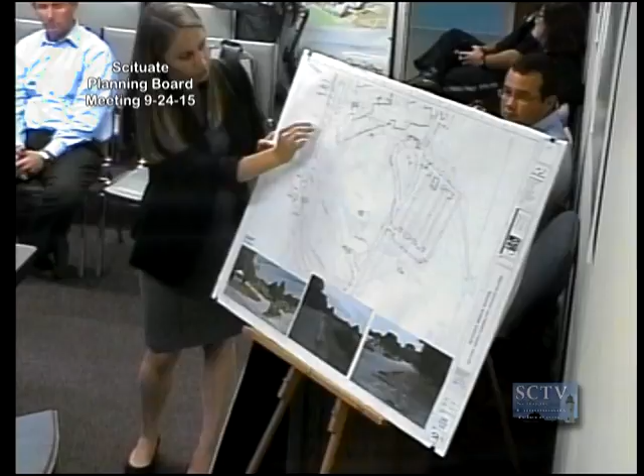Both are related to the driveway. Sorry, I know this is tough to see because it's in black and white. So the first thing we looked at was the access being provided off Chief Justice Cushing Highway. Something we had discussed before is maybe widening this drive a little to provide a third lane, so you would have 2 lanes for egress and 1 lane for coming into the site, up to a point about 400 feet into the development.

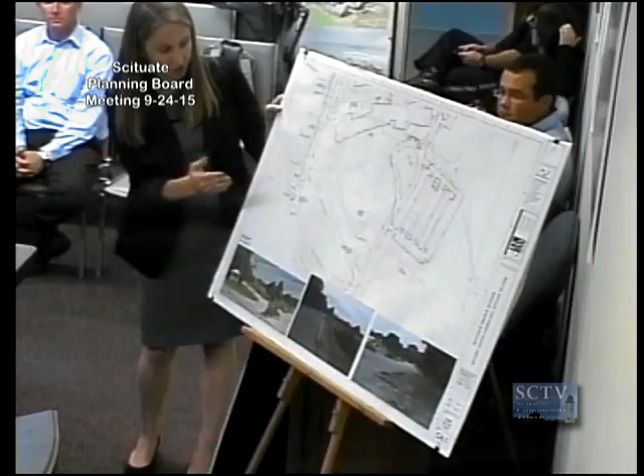This configuration allows for that, and actually uses area already being used for parking - that gravelly shoulder, already kind of a degraded area, so it formalizes that with curbing and pavement. It's a pretty minor change, but it allows for much better use as far as exiting the site. So you have 2 lanes coming over to the right-hand side, allowing for left and right out onto 3A. If there are any questions, I can address them.

And that doesn't change the curb cut on 3A? Exactly. We wanted a solution that wouldn't touch the curb cut so we wouldn't have to work with Mass Highway - it was already wide enough. It does, however, require a little reconfiguration of the existing landscaped island. It just shifts it closer to the south, you can see here. But that's about it - it can still be a landscaped island.

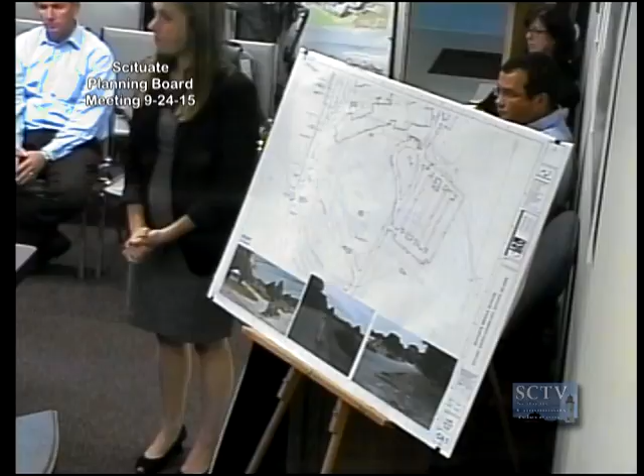So you did that portion - have you addressed First Parish Road on another sheet, or is that next? That already had 2 lanes for egress, so we had already provided that there. There were no other issues raised for the First Parish exit.

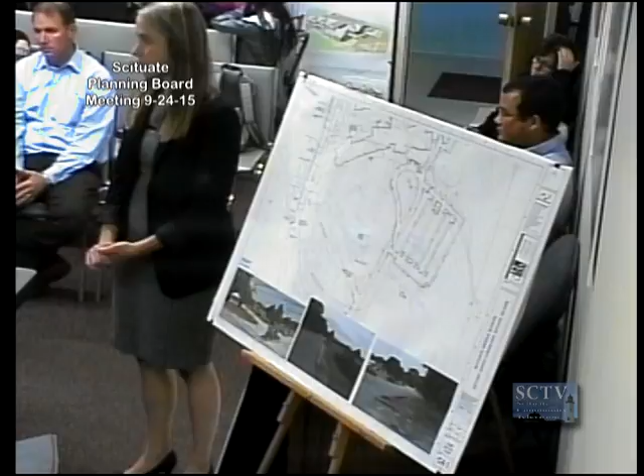I'm not sure what else. Okay, well, would you put an island, something that would really delineate between the 2? Yes. So you have 1 way in, and 2 lanes leaving. 2 lanes leaving. Well, there's an island there now.

Yeah, it is, okay. I'm just thinking about what it looks like now with the Town Hall lot also being there, just playing with that. Yeah, pictures covering it, unfortunately. Yeah, I know, exactly, I wasn't.

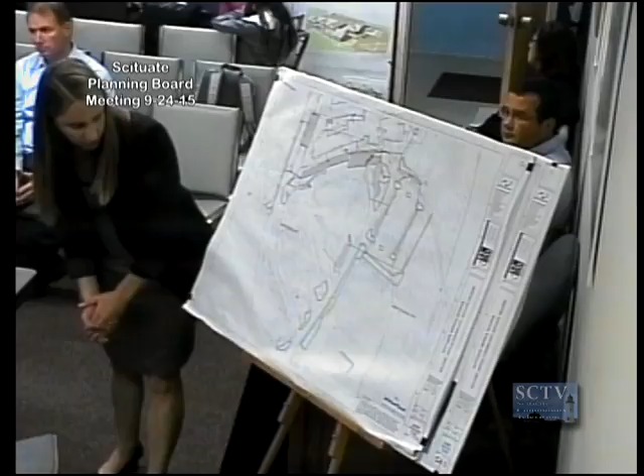We were proposing - because there was such a wide expanse of pavement, we were trying to formalize the exit to provide the 2 egress lanes. So that is the design. So you'll have 2 lanes exiting, well-marked with arrows - which goes which way? Yes, definitely, with striping and signage.

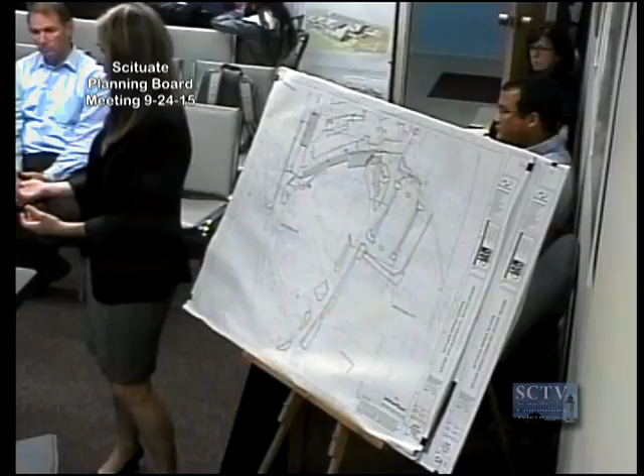And have you determined about the access around what is now Town Hall? Is that going to be one way all the way around, or what? So we've actually discussed a lot of options, and this did come up with the Traffic Rules and Regulation Committee. First, the use of that is outside the scope of this project.

But in terms of the recommendation of Niche and their traffic engineer, it's really up to the town, but it'd be fine to use the traditional - we talked with the Rules and Regulations Committee, and they recommend making them both one way. I think they had done a diagram of that - keep the front of Town Hall in its traditional direction, because the parking is already angled to go with that, and then make the back of Town Hall go from the high school side to the middle school side.

Okay, all right, so their comment was to make them both one way, which our engineer endorsed, with traffic control signs, signage and striping. Yeah, I think that's what we talked about last time. Yeah, if I remember right, yeah.

And also, did you reconfigure further out by the high school, that mess? Yes, we did. I knew you had something else to say. I had something for you. Oh, good. Spin this around. All right.

So again, I know this is tough to see, but we heard you. We saw that you're completely right. When you're coming up here, you're ending up right in the middle of the island. So what we're proposing to do is realign the island, shifting it in.

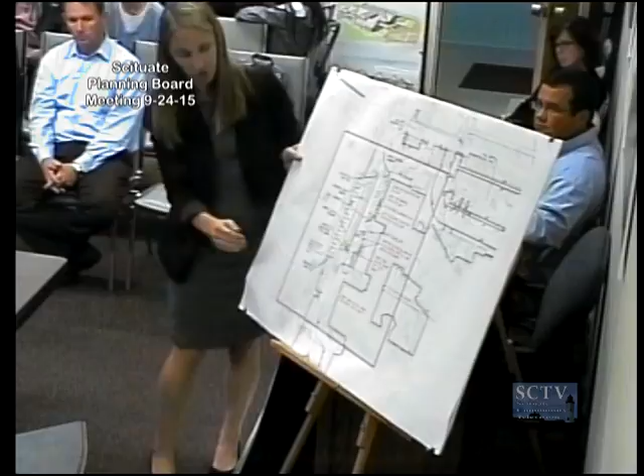We also have some signage to make it more clear. When we spoke with our traffic engineer, one of his recommendations was to pull some signage way back here, so you know what you're approaching, and know whether to go right for a drop-off or continue straight to get to the parking in the rear of the site.

All right, and then just one last thing. It has to do with traffic. You had mentioned at the last meeting that you are putting some type of an area in front of the school that emergency vehicles would be able to traverse, but in order to leave, they would have to back up, and it had to do with the canopy?

There is a reinforced turf lane for emergency vehicles that runs along the front of the new school. But would they be able to continue out past the front door and into the circle? No, they would not. Because the canopy, and there's a mounding of earth, and then there's the vernal pool, so those 3 components pretty much create a barrier.

What we did do is, based on conversations with the fire department, extend that and reorganize the science area a little bit so that lane would continue all the way across A wing and B wing. Originally, it only covered A wing, and there was a gap. But now it will be able to go all the way across B wing if that's necessary, and it can reach the main entrance and C wing from the bus and car drop-off.

Okay, my concern is having safety vehicles back up out of the site. Yeah, the courtyard too. I mean, it's not designed to be regularly used. I understand, but all it takes is one instance - what if you telescoped down the canopy so it wasn't as long? I think we would have considered that. The purpose of the canopy is to reach out and grab the pedestrians when they get dropped off, so they can come into the building covered.

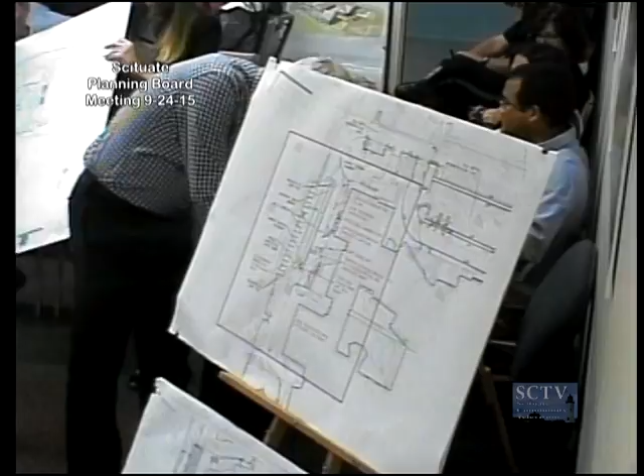Can you just put up the large drawing? Yeah, bring it up, we're gonna have to hold it up though. You have a splice, right? Yeah. Is that in here? Sorry, John, no, it's okay. I can hold it. I'll hold it.

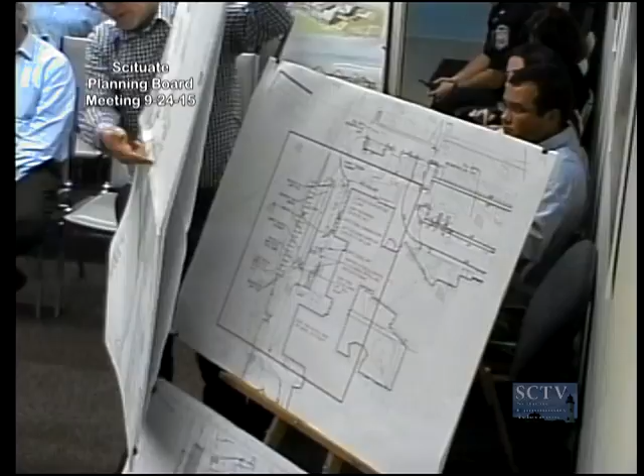So it's dashed here, but the canopy extends out this far. And as Don's saying, the front entrance is actually recessed, and we're limited in our footprint, and at this point our footprint is fixed with the MSBA. The administration wing sticks out in front, so as you're dropping off, you actually can't see the front door. So the extension of the canopy is important, not only to provide a little bit of protection as students are dropped off, but to announce that entry and make it clear where it is located.

And then we have a raised berm here, and then the vernal pool. In general, we've worked hard with conservation to provide a mowed area right up against the school, but to naturalize it as quickly as possible as part of the enhancement of the boundaries of the vernal pool.

So we're trying to limit our development south of the school. Where would this safety boundary be? It's dashed in here, but it actually is the boundary. What this doesn't show is we have a pedestrian path that will be paved to denote the edge.

So the vehicles, if they do have to use it, will know where the edge is. The grass meets it here, and it goes all the way here now. We've redesigned this to allow a vehicle to go this far, so we have complete coverage between the vehicle and the edge.

These bollards are removable. A fire vehicle could drive up onto the plaza and, if necessary, drive all the way there. It seems to me in the case of an emergency and needing to do that, which would be infrequent, certainly...

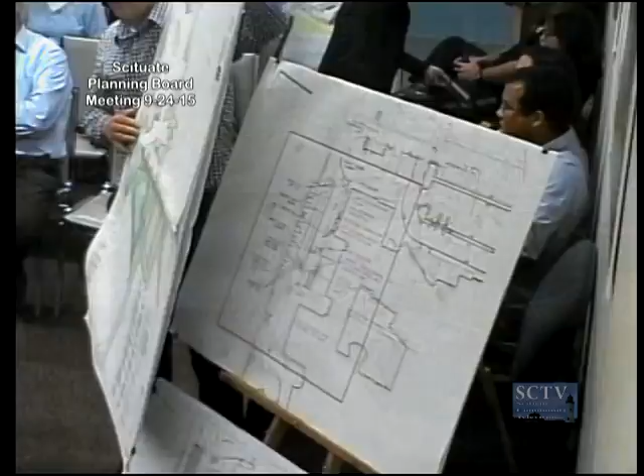That backing out would be monitored by fire department personnel or staff. It wouldn't be an uncontrolled or unsupervised maneuver. The people driving the vehicle would be closely coordinating with somebody on the ground, signaling them, that sort of thing. So admittedly, it's a little awkward to do, but I can't imagine it would be truly unsafe. It should never be used, though.

It's a fully sprinkled building. For a fire to get out of control to the point where you need to drive a truck over here, it would really be a catastrophic event.

Correct. Now, if it's just an emergency response, like an ambulance response, it would come to the front door, or possibly through the courtyard.

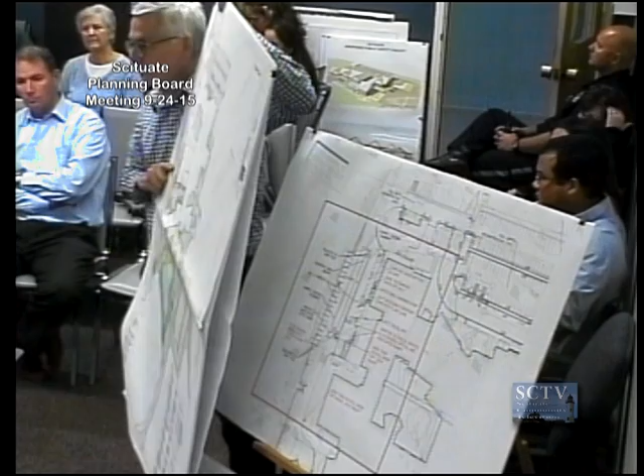Thank you. Thank you. Okay.

Laura? Well, I think one of the things that's happened between the last meeting and now was the traffic rules and regulations meeting. I wasn't there, but I understand there was discussion about an emergency access where the pedestrian walkway goes up to Cedarwood Road, and it would only be for emergency vehicles. There would be bollards at the top, so you could not drive a car there at all.

And that was something the chief wanted. He wanted yellow striping on all of the fire lanes. And then I think the other issue was—Bill, do you remember if there were any other issues besides that?

We also talked about access from First Parish, in the event that there was an emergency during drop-off, with all the cars queued, coming in and out on those three lanes. How can a vehicle get there or to the back of the high school?

So what we've done is, we had a granite curb with sidewalk along here, and we're going to change that to just be a Cape Cod berm, like it is right now—it's actually a little decayed, but right now it's a Cape Cod berm. So if there was an emergency during pickup, vehicles would be able to drive right over that.

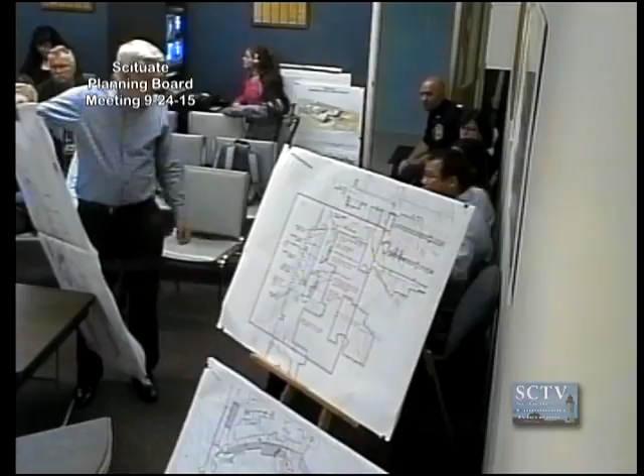Okay. I would emphasize, we're not required to provide 360-degree access to the building. We're doing this as a benefit to the project.

Any other comments? Okay, all right. Do you want me to make a motion to close the public hearing? I move that we close the public hearing on this Scituate Middle School project. Do we have a second? Second. All those in favor? Aye.

Okay, let's move on to findings of fact. Everyone got the findings of fact - I had a number of email exchanges, and then tonight I got a couple of additional changes.

Is this what I'm reading? This is one of the new ones that says 5 PM on it. Timestamp - this is 5 PM, right on the front, yeah. All right, thank you, sir. That's public safety, and this is just the findings of fact. Oh yeah, this is public safety - building. Laura, this is public safety. It's the wrong one - good catch.

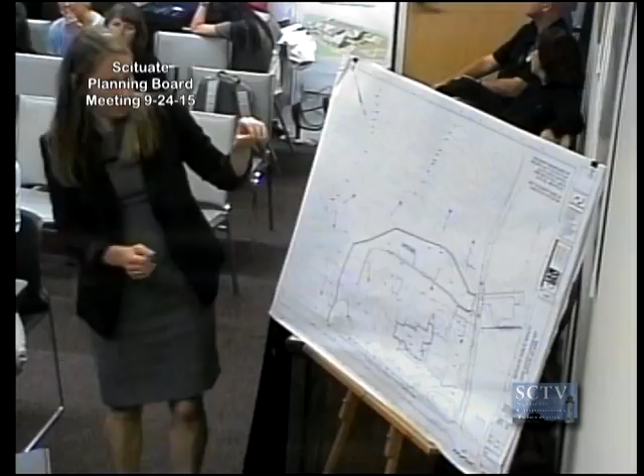So you can see this is our site down here right at the corner of 3A and Mann Lot Road. And as we discussed, it's kind of isolated from the greater parcel. You can really see that here with these contours.

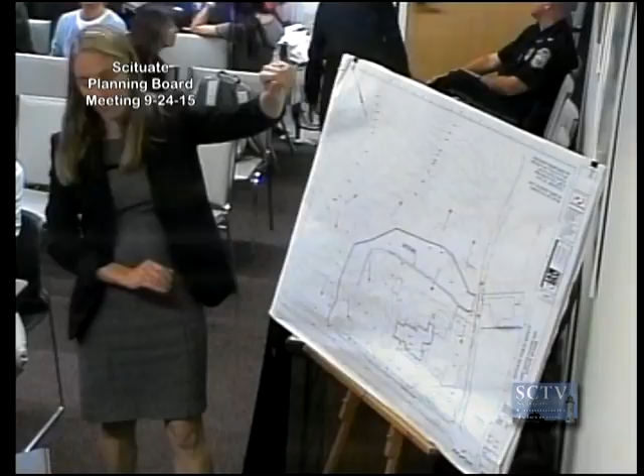This is a high point here, a 129 contour. It slopes down to 124 at the highway, and then back toward the eastern side of the Ellis parcel down to 119. You can see there's actually another wetland located way outside of the project, down that back slope.

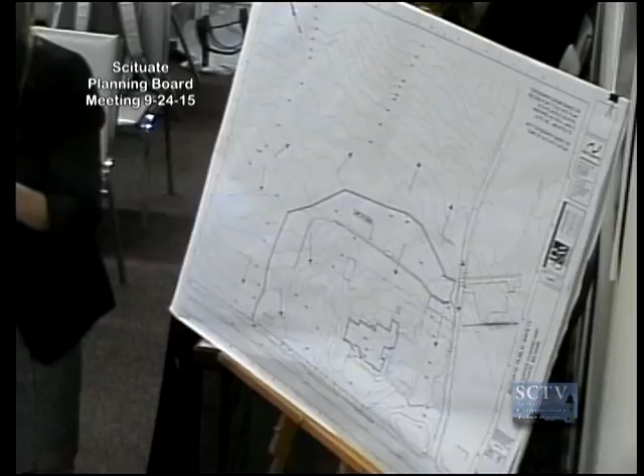There's another high point located just outside of our limit of work that is also pushing water towards the site and then back down Mann Lot Road. So you can see the limit of work line here does include the berm, and right along that line is the swale we discussed, where any water coming down the back side of the berm and water coming from the ridge line towards the site will be pushed towards the site drainage system in that swale.

What's the red thing, the broken line? That's the ridge line — the red is the watershed divide, and the red arrows indicate the flow of water either away from the site or in towards the site.

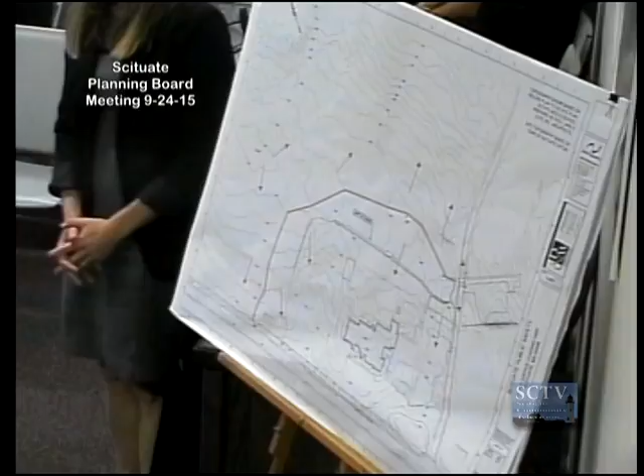So I'm looking at your red ridgeline there. Why doesn't it go all the way to the high point? Because we were looking specifically at what flows into the site. There's actually another break right here - the 122 is split. So from this high point, which is probably 122 and a half or so, this is what's coming into the site, so we took a perpendicular up from that. Water coming down this high point will come straight to the roadway and not be intercepted into the site. That's limited to what's hitting this area here.

So it doesn't climb that slight ridge, it just goes straight towards the highway. With more definition, maybe the line would be here or so, but generally that's it. Yeah, a 1-foot contour is actually pretty good for such a big area.

Okay, I'm having trouble following your contour line straight down. That's a ridge line right there? So this is kind of an interim ridge line - it's probably more apt to describe it as a watershed boundary, because if you were going high point to high point, I see what you're saying, you're thinking it should be pushed further. Yeah, I'm thinking it should run to the high point.

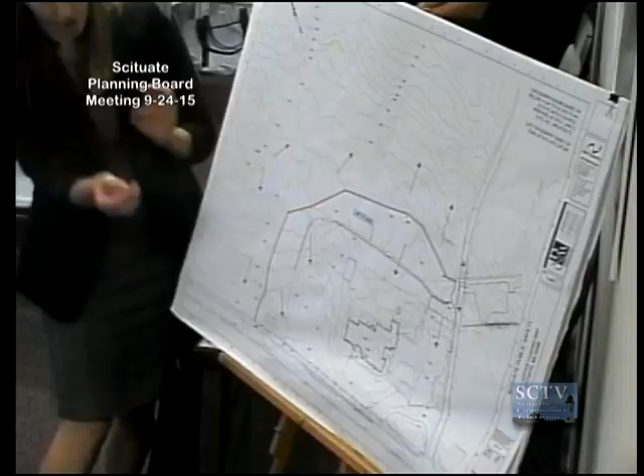If water flowing in this direction is being intercepted at this low point here, this 122, which is flowing this way - we were focused on water flowing in this 122 towards the site. Doesn't water flow this way, right? You can kind of picture it as a cup, like the contour here. It creates like a swale or channel that pushes water along the right-of-way, similar to how there's usually a roadside swale or a crown created - you have the high point there in that swale. That's right, right here. Yep, this is breaking toward the north versus what's breaking toward the intersection.

Right, and there are some existing catch basins - there's one right here, that's what you're seeing. I think part of your concern too is you want to see that horizontal line continue horizontally, right? Along there - yeah, I'm just thinking if that's the high point, if it's sort of a secondary peak, it's going to drain in all directions, right? The primary line is across the top as you're suggesting. As Jennifer said, this is more of a secondary little ridge, just trying to show what would flow towards the parcel.

So a raindrop that falls on one side of the line stays on that side, whether it's going on our side or the other side. Because the land moves up and down right there, that spot? Right here, or close to it - there's a little mini ridge running down there. Okay, that's what I was trying to understand, it didn't look like it.

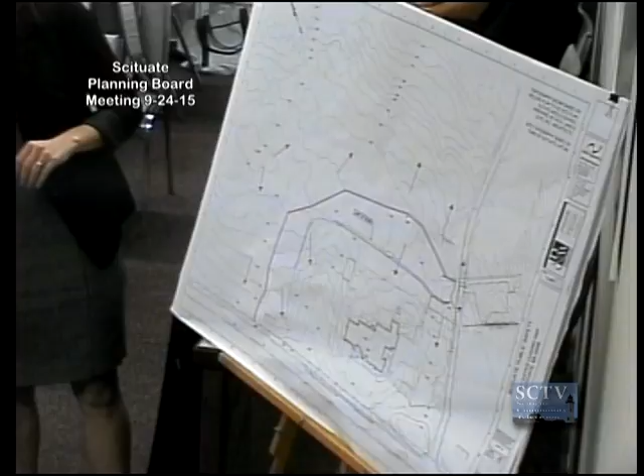Where - and that's the current natural boundary, this is the existing condition, that's right. You can see the contour line wiggles down just a little bit where that ridge line goes towards it, wiggles down towards the bottom of the sheet. So that indicates that's the high point of that particular contour line, right in that area.

So, yeah, I think I see it - it's kind of running down and a little bit towards the site when you get to the bottom. That's right. And so the area that we see...

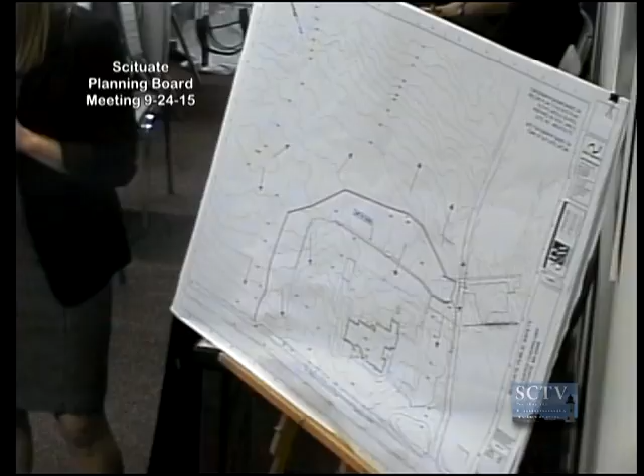Headed towards the site itself, inside the red ridge line - that's all been accounted for in terms of stormwater collection into the existing stormwater systems? That's right. Okay, and so we won't end up with pools and ponds of water in that area there? Right, exactly - that's the intent of having that swale on the outside of the berm, so that you wouldn't have that, no more than it would pool today.

Right, nor more importantly, will you end up increasing the possibility of that on the other side of the line where the abutters are? That's right, it should have no effect on that other side of the line. That's right.

Right, that's all natural boundary there. Yeah, exactly, that's a separate watershed. And then you're controlling the water on the outside of the berm.

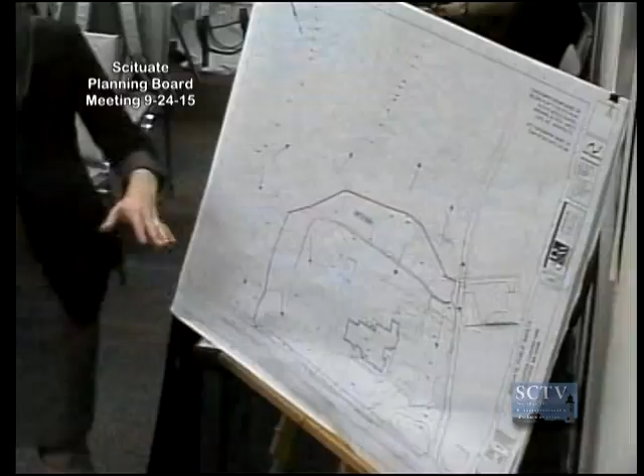So all that water, before you do anything here, it all feeds to the 3A swale, everything right now? That's right. All the water within this red line is what was modeled to the existing points where water's flowing, which is this culvert here that runs under 3A, and again the wetland here. So that's what our analysis is focused on, those two existing drainage points. Okay, so essentially we're looking at the watershed you did the analysis on then? That's exactly right.

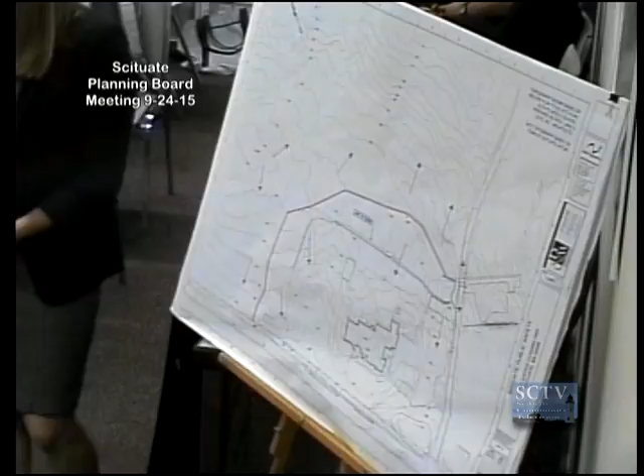Any questions? What have I done on the other side of the road for the septic? Have I changed the grading significantly there? No, we did a little bit of minor grading, actually. You can see it better on this other plan.

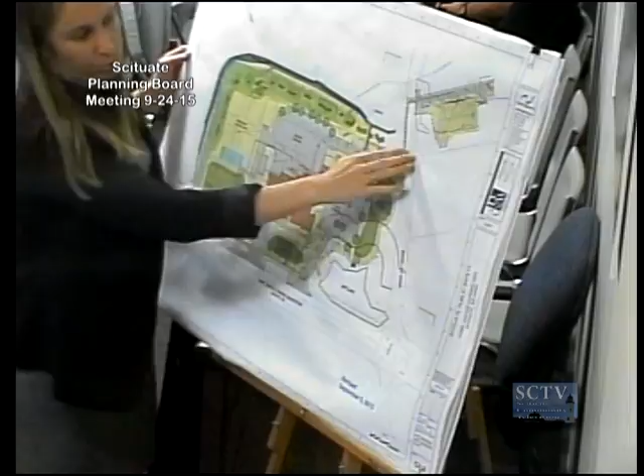The high point of the existing natural high point along the property divide between my parcel, and a little bit of grading was required to kind of flatten the slope over the septic system. But all of the drainage is going to be collected, again, in a swale that's running along this gravel driveway to an area drain that's connected to a perforated pipe system. Initially we had a dry well, but Merrill had asked us to take a look and make sure we were providing maximum offset to groundwater. So by doing a perforated pipe, we were able to raise the system, still maintaining the controls.

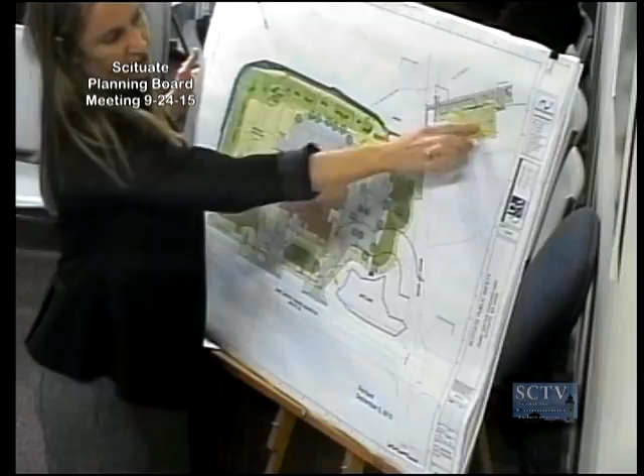It's the same type of analysis where you're matching runoff rates and volumes. So it drains bottom to top, and then it's collected to the right. Okay, to the actually, left. There's a culvert right here for this, pushing one way. Okay, and then pushing here. Got it. Okay.

Got another question on this? Yeah, not on the drainage, on the driveway. Is it appropriate to go to that? Or do you want to stay on?

All right, just a thought, that driveway off of 3A that goes to the public parking was kind of represented at one point as an emergency ingress to the site, in case I've got a problem driving on 3A and I want to get my passenger or myself to a place where I can get emergency assistance. Actually, that's on the apparatus bay apron itself.

Okay, that was my question. We created a cutout, the apparatus bay. I was going to ask if a cutout wouldn't be appropriate on that other drive, but you put it there on the apparatus bay because if the bay doors are open, you can go right in, or you can go in the main entrance, and there's a triage room just off the lobby. That's where I pull over in that circumstance.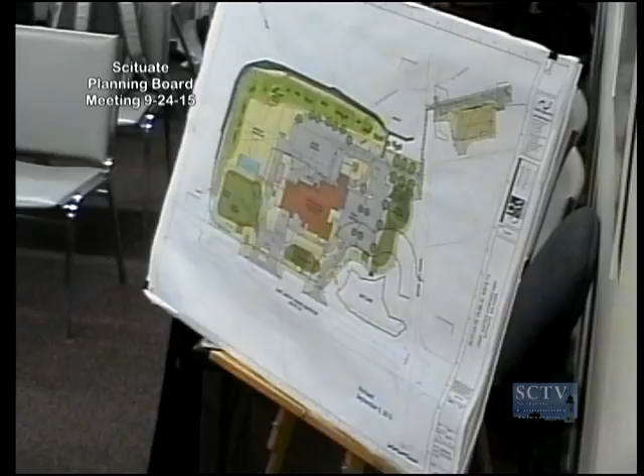Yeah, and that's what people will do now if they have an emergency, because that's the most visible thing, you see the big apparatus bay doors. Exactly. Thank you, good.

And then, can you give us an update on the traffic analysis? Sure, how much of an update do you want? I can go through a quick presentation, or I can just answer questions if you have specific questions. I wouldn't mind the presentation. Since you set it up, we're going to watch it. As long as you're ready to do that. Now if I can get it to go, let's give me this.

All right, so again, for the record, John Diaz with GPI. We came in to look at the traffic operations and mostly look at the interface with the new site at 3A in terms of how to get the emergency vehicles in and out of the site. So we did a typical traffic study. We looked at the site at the corner of Mann Lot Road and 3A, the northeast corner. Did our traffic counts back in April, in the spring. Basically, you have about 15,000 vehicles a day on 3A. You have about 2,000 on Mann Lot Road on the easterly leg and a little more on the westerly leg, about 2,400. That's total traffic over 24 hours a day.

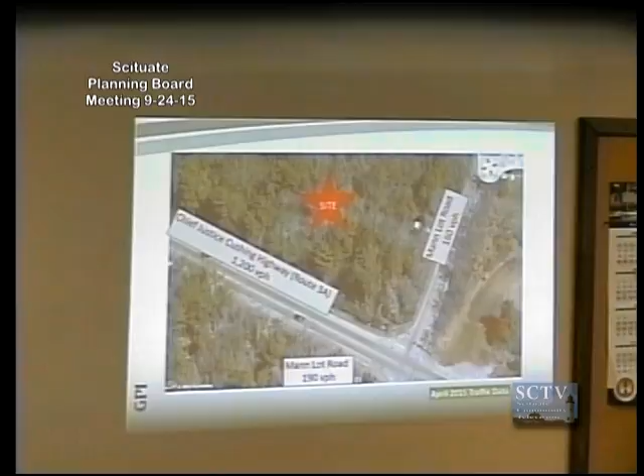We did the turning movement counts at the intersections. Again, we looked at the intersection of Mann Lot Road, and we had the counts on 3A and Mann Lot Road itself. And you can see the movements coming out of Mann Lot Road in the morning.

It's pretty much consistent. You've got about a third going left, about a third going right, and about a third going straight through. Similarly, in the afternoon, same proportions. Coming down the eastbound side, it's a predominantly heavier left turn in the morning and a heavier right turn in the afternoon. And then obviously the directional flow on 3A is what you'd expect: northbound in the morning, southbound coming back. So pretty typical of commuter traffic, what we'd expect to see out there.

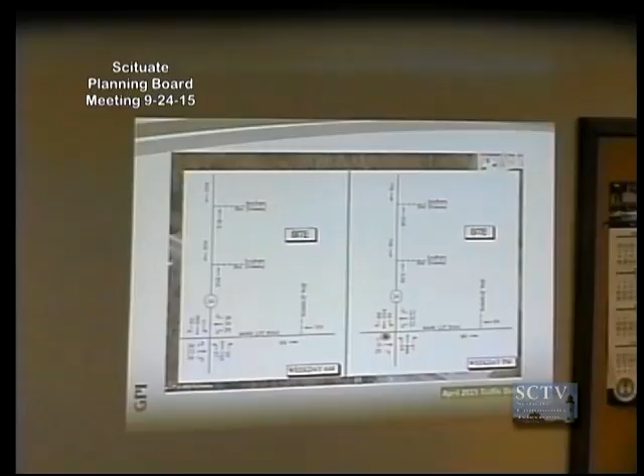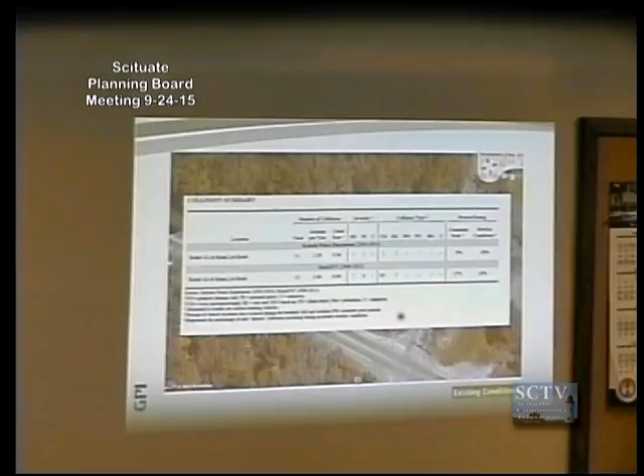We looked at the crash histories at the intersection of Mann Lot Road. We went to both the Mass DOT website and the Scituate Police Department. Between 2010 and 2014, we had about just over 2 collisions a year. It's more important to look at the crash rate, which takes into account the volume of the intersection, not just the number. The crash rate at the intersection is about 0.36 crashes per million entering vehicles. For comparison, the statewide average is about 0.6, and Mass DOT District 5 is just under that, about 0.58. So in terms of how the crashes relate to other unsignalized intersections, this is what we consider a lower crash rate, not a significant safety issue in terms of the number of crashes related to the volume of vehicles there.

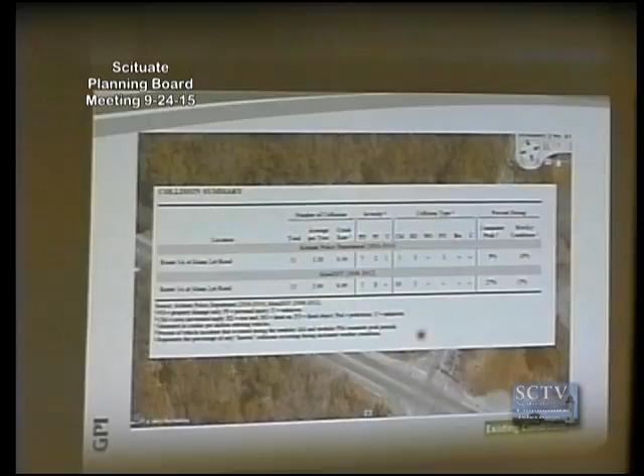The other thing we did is we collected speeds both along 3A and Mann Lot Road in the vicinity where the driveway is proposed. We use that for a couple things: to see how consistent it is with the posted speed, but more importantly so we can evaluate the sight lines for the driveways, how far someone can see up and down the road and how far someone on the road can see the intersections.

The speeds, we look at average as well as 85th percentile speeds. Generally, speed limits are posted in accordance with the 85th percentile speed, and you can see it's posted 50 miles an hour on 3A, and your 85th is right in that range, 47 miles an hour. So it's pretty consistent with what's posted out there. These were collected over a 48-hour period, an average of a 48-hour period.

Mann Lot Road, again, it's a little higher than its posted speed. The average speed is 30 miles an hour. The 85th is a little higher, 33, 34 miles an hour. But again, pretty consistent with what's posted out there for the speed limit.

In terms of the sight lines, as you'd expect, up and down Route 3A, it's a straight shot there. There's really nothing that would affect sight lines once the driveways and trees are cleared out, obviously. We have well over 600 feet, and your requirements along 3A are in the 400-foot range, so we have well in excess of what we need for sight lines.

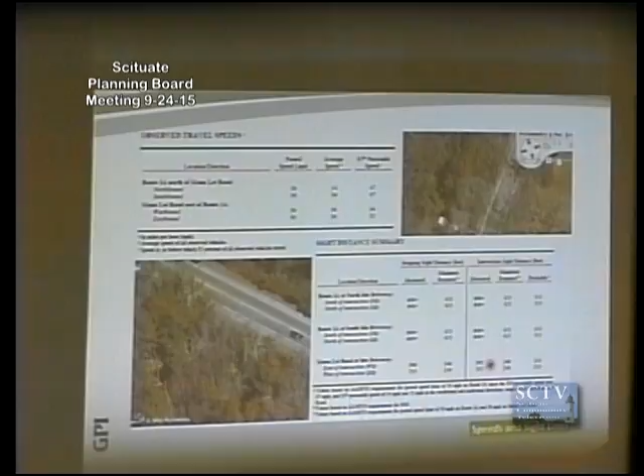So then the next challenge was to figure out what the site's going to generate for traffic. It's kind of obviously a unique site — it's not a Dunkin' Donuts, you can't just look up a number and figure out what it's going to be.

We didn't concentrate on the amount of emergency calls because that fluctuates and you can't accurately predict it. Instead, we looked at the staff that's going to be there, which is your daily traffic coming in and out. We talked with the police chief and fire chief and based it on shift changes, how many people come in and out during peak hours. That's how we came up with the trip generation, and then for every staff member we added about 4 or 5 trips to account for use of the public open space and the meeting room there.

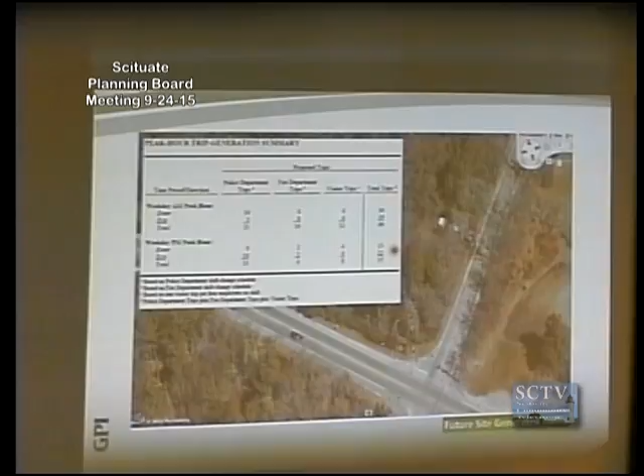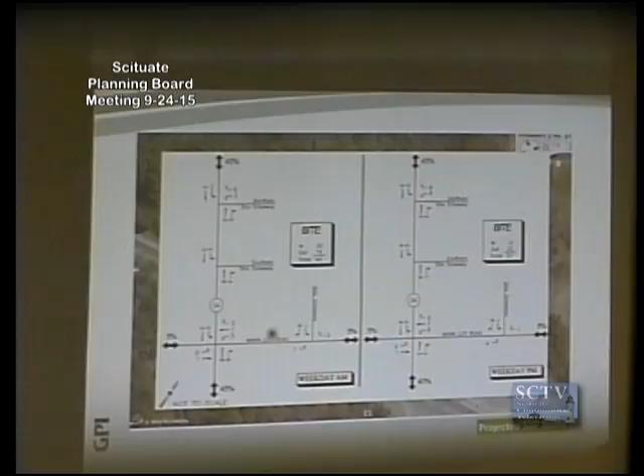We had a meeting last week and discussed some options. You could post a no left turn sign there, except for emergency vehicles, if there's a concern about traffic heading east on Mann Lot Road. You could direct any of this site traffic back out to Route 3A.

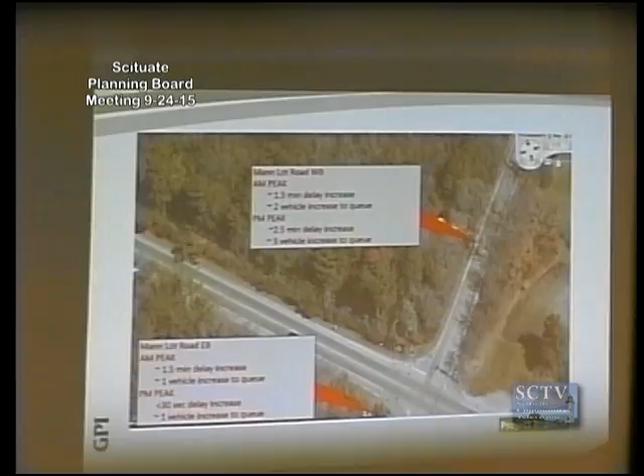In terms of impacts to Mann Lot Road, we compared background development, which increased the traffic overall. But looking at the additional traffic to Mann Lot Road associated with the site, in terms of additional delays to the approaches and the number of vehicles in the queue, in the morning coming westbound along Mann Lot Road towards Route 3A, you're looking at about a 1.5 minute increased delay with about 2 additional vehicles in the queue. In the evening, there's a little more activity coming out of the site, so it's about a 3-minute delay, a little less than 3 minutes, and about 3 vehicles added to that queue.

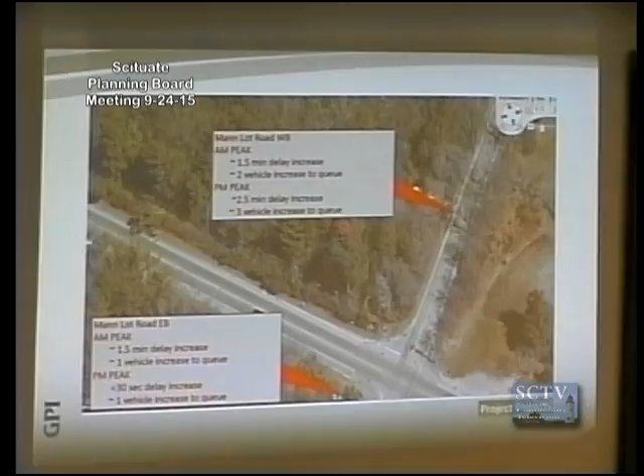Obviously the impacts on the other side, coming eastbound, are less since you wouldn't have the driveway on the easterly side. It's less than 2 minutes increased delay in the morning with about another vehicle added, and less than a minute with another vehicle added in the afternoon.

Similar to the train application with the wigwags you see when a train is coming, it's a similar operation. The signal is dark. When they press the button in the fire station, it goes to a flashing yellow, then a steady yellow arrow, and then you have the alternating wigwag flash conditions.

It draws a little more attention than a normal flashing yellow that goes to red. We've seen a lot of cases — I'll never forget, I was at an intersection testing the signal and a school bus went right through. You get so attuned to seeing that flashing yellow that when it changes, you don't recognize it. So this is meant to grab your attention that something different happens when the vehicles come out.

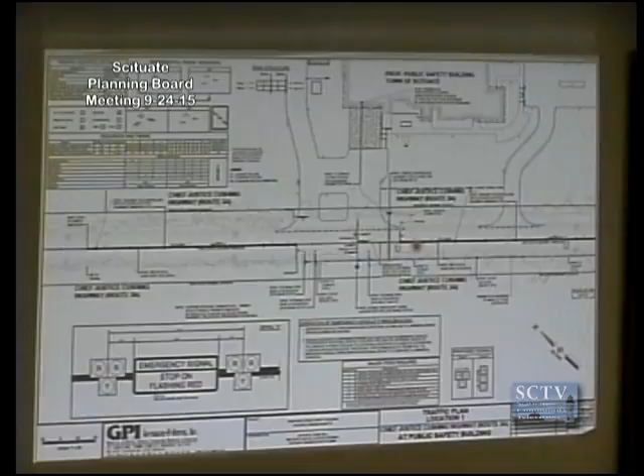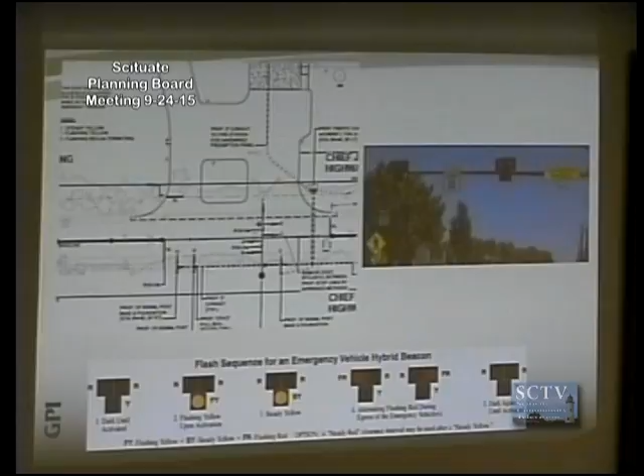There was some discussion initially about signalizing Mann Lot Road as well. When we first got involved with the project, this access drive was much closer to Mann Lot Road, about 400 feet. At the time, we were concerned about the interaction of turning vehicles coming out and being able to stop in time with a line of sight to see the signal at the access door. We were also concerned about potentially queuing, someone stopped in the middle of the intersection, particularly during the peak hour.

Since then, with the revisions to the site plan, the drive has progressively moved north. Now we're about 600 feet away from the intersection of Mann Lot Road. So now as you make those turns coming out of Mann Lot Road, you'll be squared up nicely with this signal. We'll put that signal on hold for now and just concentrate on the apparatus at the front door. That's an overview of the traffic.

Great, so all of the emergency vehicles are coming out to 3A. They're not going out onto Mann Lot Road, correct. And that's primarily what the signal's there for, is to get that.

Okay, great, thank you. Any questions? I like the signal. What it does is it minimizes the use of Mann Lot as another cut-through getting up to 3A, another controlled intersection. I think it just would keep it back. Level of service should be right where it is now.

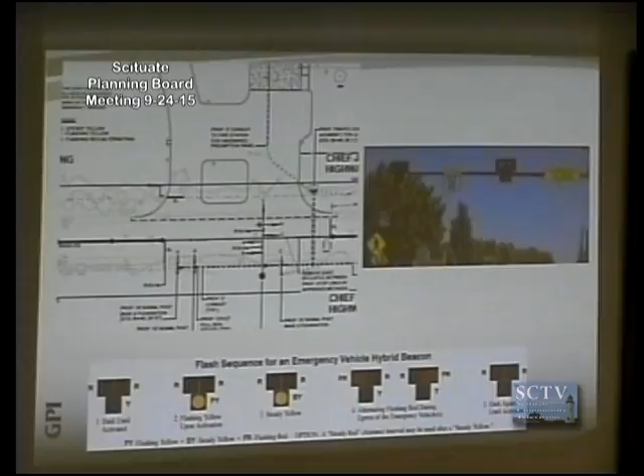Laura, did you have any other? Not really, no. I think you got comments on the septic system today. It's not really part of the planning board's jurisdiction, the Board of Health is addressing that. It can be approved subject to their approval. The driveway was moved, the Conservation Commission closed their public hearing, the stormwater system was signed off, and there have been these minor changes in the traffic improvements.

Okay, let me just open it up for any comments from the public. Can you identify yourself? Oh, I'm sorry, Maureen Dowd, Puritan Drive, off of Mann Lot Road.

This stop sign, is this going to be a stop on the south side of Mann Lot Road? Is that going to be the stop line, or is the stop line going to be on the north side of Mann Lot Road? The stop line will be north of Mann Lot Road as you're going north.

So in other words, if you were coming westbound on Mann Lot Road, you'd take a right, and the signal will be there, and that's where the stop line is. And you could go across even though the light is flashing? If the emergency vehicle lights were on Mann Lot Road at the front door, yes, you could go straight across. And coming out of Mann Lot, you could then turn south on 3A? You could turn left, correct.

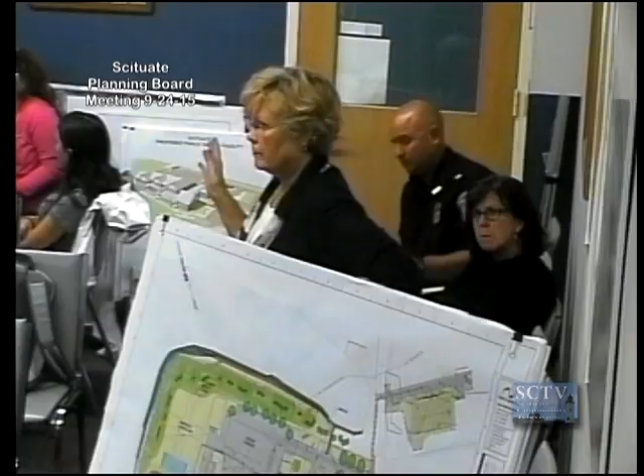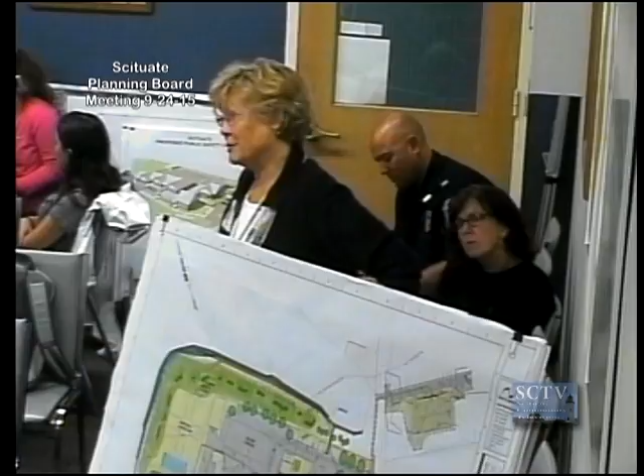That road was a restricted road for weight. It was posted at both 3A and Country Way. The sign on Country Way disappeared a long, long time ago. The sign on 3A was there, and I can't really remember when it disappeared, but I know it was there in the 80s and early 90s. There was a weight restriction on trucks coming down that road for the major fact that it's a little country road, and where those telephone poles stick out, we've only got 16 and a half to 17 feet across.

So I know that fire engines are very heavy. As they come flying down that road, even if they're mandated to have their lights and sirens on, if I'm coming up that road, I hear them coming, I know they're coming, they're 9 feet across. There's no place for me to go to get out of the way. There's no place for me to pull over.

The berm that she was talking about that is now a ditch is washed out every year. As the water drains down the hill, it's completely washed out, so it's a deep ditch. On the other side of that is a high stone wall retaining ground for the cemetery. So there's no place to pull off the road, even if you had to. And that would be in a regular car.

If a bus is coming up that road, kids are getting off that road, God forbid somebody should be walking on that road with somebody in a stroller when those emergency vehicles come down that road, there's no place to go. It's all over. And although the study was done with the regular cars going up and down the road, and I can believe and see your studies on that...

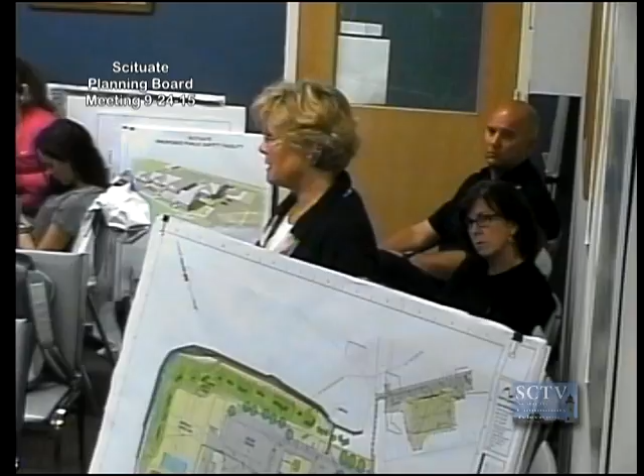Nobody's bothered to look at the fact that when the fire station is moved from its present location up to Route 3A, the access to get to parts of Countryway, Hollett Street, Hatherly School, Captain Peirce Road - they're all going to come down Mann Lot Road. All of those areas now being serviced by trucks coming down First Parish and onto Countryway are now going to be serviced by going down Manlock, unless the truck goes all the way down 3A, all the way back to First Parish, down First Parish and down Countryway, which certainly is going to extend its response time. And one of the main reasons for this building is to make the response time shorter for these parts of the town.

So I don't know what kind of study can be done. You've stated that you did not study how much the emergency vehicles are going to impact that road. But as I see it, from somebody who's lived there my whole life, there's going to be a big impact of these vehicles coming down the road. There has to be. It's only common sense.

And even if they go north and come down Booth Hill Road, it isn't much better than 3A or Manlock - they're both little tiny narrow roads. There's no other road in between Henry Turner Bailey and First Parish to take. Arbor Way winds all the way through the neighborhood, so they're not going to use that for a fast response. So somewhere, even though it's supposedly out of the scope of this public safety complex, as Ann said, Mann Lot Road has got to be looked at, and looked at seriously.

We have an accident waiting to happen here, and I mean a bad accident - something that is really going to cause life injuries. And as my neighbor pointed out, and you answered very nicely about the fire engines coming around and the cars possibly blocking Manlock and 3A...

The other issue we have is when you come to the end of Manlock and you're trying to cross Route 3A, continuing to the west end on Manlock - even now, where there isn't any driveway, and there's another new development that's going to be built across the street with more cars coming out - if you stop there, people coming down 3A traveling south sometimes just stop in the middle of the road and wave you to go on when you're standing at a stop sign and they have the right of way. I don't know how we can re-educate people on how they're supposed to drive, but it's a disaster.

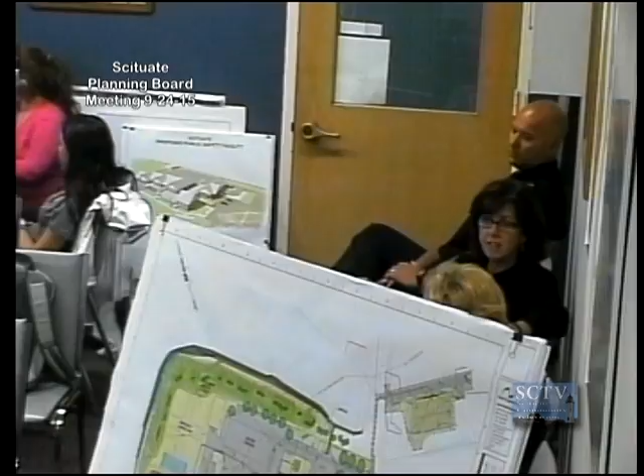Thank you, Maura Curran, Board of Selectmen. I wanted to thank Mrs. Hunt for bringing up those concerns, and let her and everyone else in the room know that today we had a meeting with Representative Cantwell and Department of Transportation District 5 engineers, who came in to look not only at Mann Lot and 3A, but also First Parish and 3A, as well as Henry Turner Bailey. So we're looking at the whole stretch, and you're right, permitting does take a while, but we've started the process and alerted them of all the development, and that intersection definitely meets the warrants needed to put a light in. So we have started the process. Thank you for that input.

Just to clarify a couple of points — I agree with everything you're saying. The emergency signal proposed at the front door is about 500 feet north of Mann Lot Road. That would be a queue of about 25 to 30 cars before it backs up through the intersection of Man Lot Road. That signal is normally free flow; it only operates to get the vehicle out, so you're only stopping traffic for about 10 seconds. So even with morning traffic going north on 3A, I don't believe you'll ever get 25 cars queued up there for one or two fire trucks to come out of the station.

That's what I said. When we were closer, when we were at like 400 feet with the driveway, we were concerned about that exact thing, where those vehicles are going to stop and that interaction. We didn't have that comfortable buffer between Mann Lot Road and where the apparatus would be coming out. But since it's moved that much, that was one of the reasons.